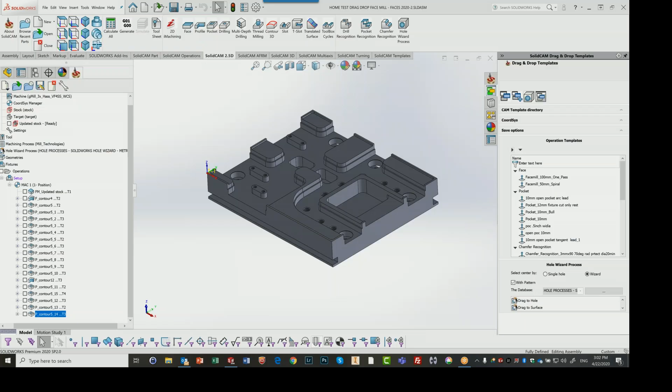If you remember from our last session, we had started working on this part, as you see on the screen. We had done a face milling operation on top, did some profiles around the part, and also worked on this pocket here in the middle.

What I asked everyone to do was homework, now that we knew the profile and pocket operation and face milling. I had asked everyone to go back and continue on with this part, working on these pockets and areas that need profiles, to see how far you can get.

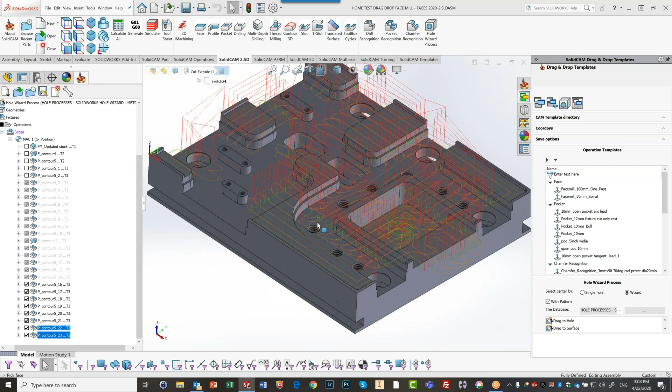Okay, so all of these operations, I can just go ahead and work on them and just drag it there instead of actually creating new operations each time. And this I can do for every single one of these areas. Now you'll also note, let me just get rid of all those check marks.

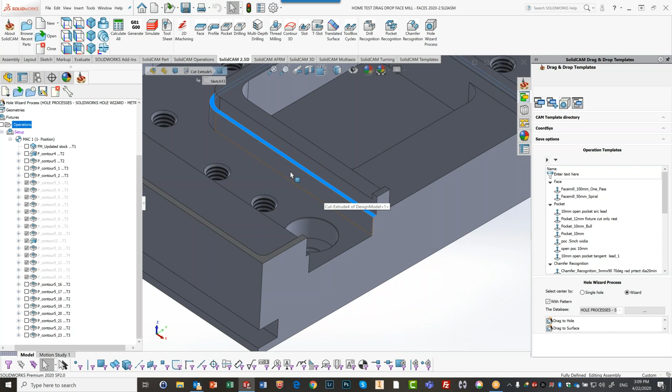I have a step over here, this area over here. Now, it may seem like a simple profile, which it actually really is, just a simple profile operation. But since this is a surface, I can actually treat this just like a pocket operation. Why is that? Because I have my geometry, which is the entire floor over here, and these edges are open edges.

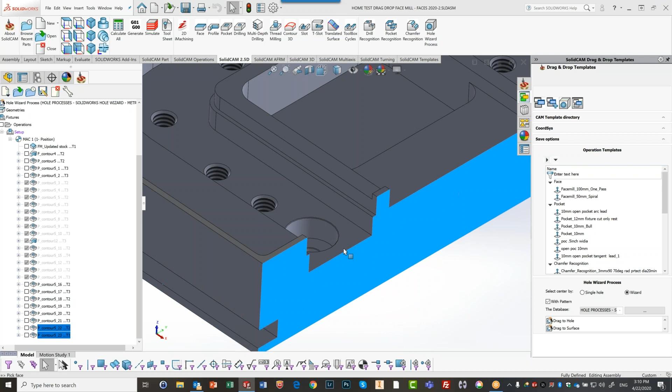Okay, so let's say I take these two operations that I created before. Or I can actually say these are over here as well. Why am I going all over the place? I'm going to take these two operations. Why these two? We have a rough and finish. I can take them, drag it to that surface. I'm going to hold my control button, then click onto this surface as well.

Continue around this surface, even this surface over here, this one over here as well. Every single one of these surfaces I can click on. And when I'm done, just let go of my control button. And as you can see, all of them are created. So basically, in just a few moments, I actually created all the operations that I really needed.

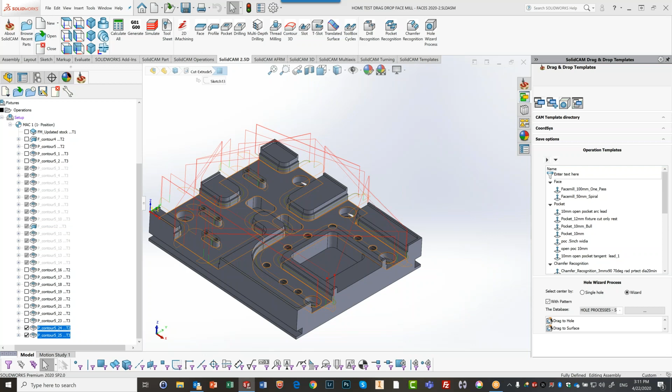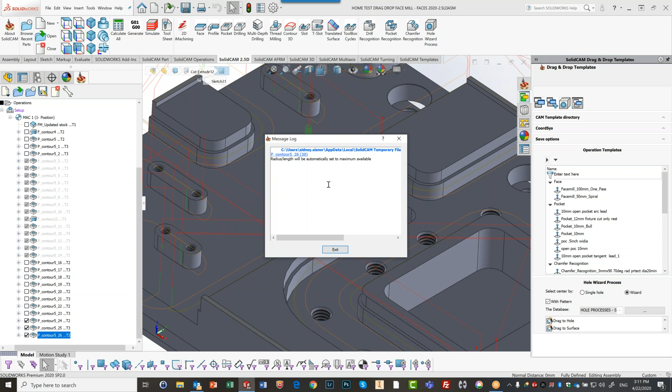Wait, there's one more. Almost forgot about it. Let's not forget about these two pockets over here. So again, I can take these operations here, drag it to this one and this one here. And we have our pockets for that area as well. Now, sometimes you may have something like this pop up. Why is that? Let me just click on OK. And get rid of these two operations over here, sorry. This and this.

I want to get to a specific operation. Just a second, which one do I want to get to? Not that one. Yes, I want to get to this operation here. So what we have here is as follows. You'll note that this type of pocket over here is a closed pocket. There are no open edges. So in order for it to plunge into this pocket, it's using a helical ramping to get into that pocket.

Now, since I used a specific tool to go into here, if I were to use this ramping angle or this diameter that I have over here, that will not fit into this area. Let me just open up that operation and let me show you what I'm talking about exactly.

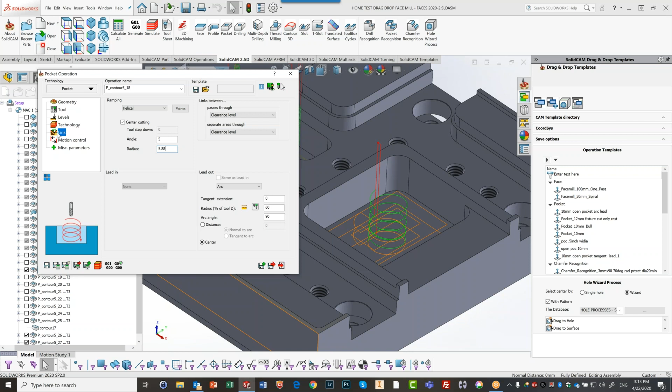If I go to my link area, you'll note that we have what we call ramping, and it's default at helical. And it's going at a 5-degree angle at a radius of 5.88, which is based just under the radius of that particular tool. This tool is, if I believe correctly, a 12-millimeter end mill.

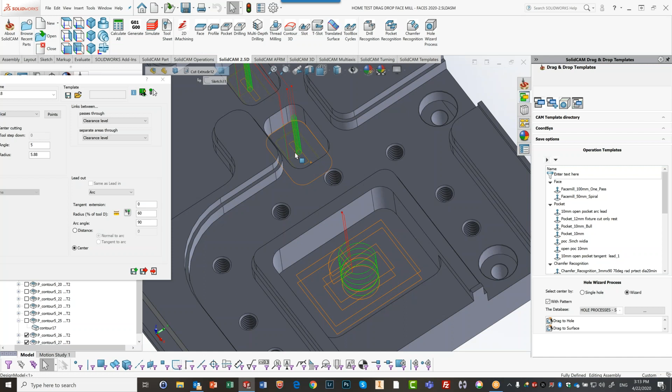Now, that's fine for over here, but it's not necessarily good for over here because this is a smaller pocket. So what that message said was, it's just correcting itself that it will use the largest possible radius for this area over here. So now that I've done this entire pocket, I want to continue on, and let's talk a little bit about the drilling operations. We did face milling, we did pocket profiles already, we did pockets, and now we want to deal with drilling operations.

So let me just get rid of what we did just now. I want to delete all of that. Just click on delete, and I can delete that. I'm going to take what I have up until here. I'm going to unsuppress. That's already stuff that I've done before. And as you can see, everything is active again.

So just to run the simulation before I do this, to see exactly what I've done up until this point, on top over here, I'm standing on operations right now. So on top, when I click on simulate, it's going to simulate the entire part. I'm going to do solid verify simulation and just play everything. And as you can see, everything over here has been machined out. So what's left to be done over here are the holes.

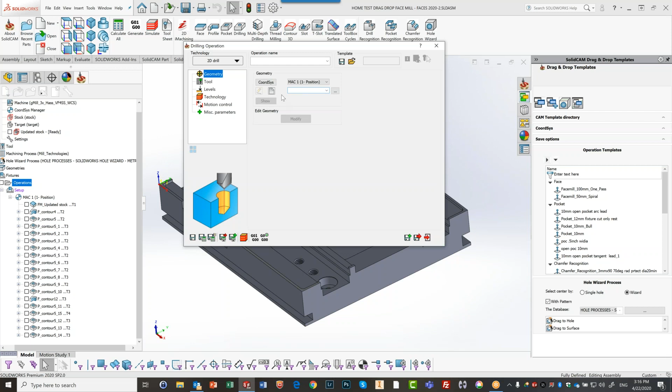Drilling operations, just like any other operation, need to have a geometry defined. Now, a drill geometry, as opposed to the other geometries, is not a boundary, but a point. What point do I actually want to drill into the part? So now, on create geometry, we have drill selection.

Right now, we have different modes for creating a drill. Let me just open that up. There's select and unselect. We have select centers by: how are we selecting the centers? Our default is multi-position. Multi-position basically means picking a face. So let's say I click on this face over here.

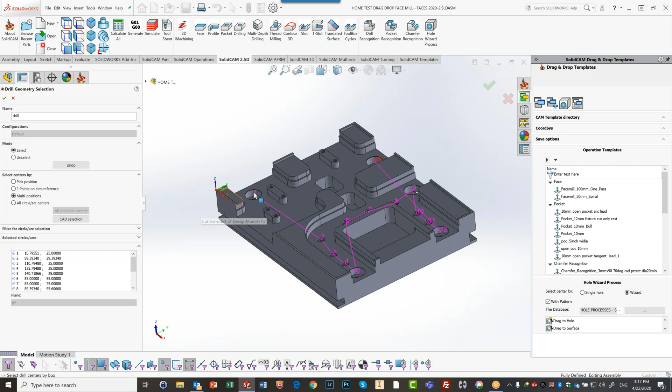You'll note that it created the geometry for every single hole that is on this face, including holes that I may not want. As you see, it took these holes here, but it also took these counterbore holes. I don't want the counterbore holes. So let me go back here; I can right click on one of them and say delete all. In other words, I need some kind of filter that's going to say I only want a specific diameter of holes.

Now, before I do that, let me just show you one more option over here. Instead of clicking on the face, I can also click on each hole individually. If I click on the inside of each hole, it creates it just for that particular hole. So that's good if I want to do individual holes. I can again do it for every single one of these holes over here. But I don't want to do it that way, so I'm going to again delete all.

What else can I do? I mentioned the word filters before. So let me open up my filter over here. Right now you see it's marked at all circles: take every single circle on the face that I click on. And that's exactly what happened. But I don't want that. So we have another option here, by radius. If I know the radius, I can write in the radius over here.

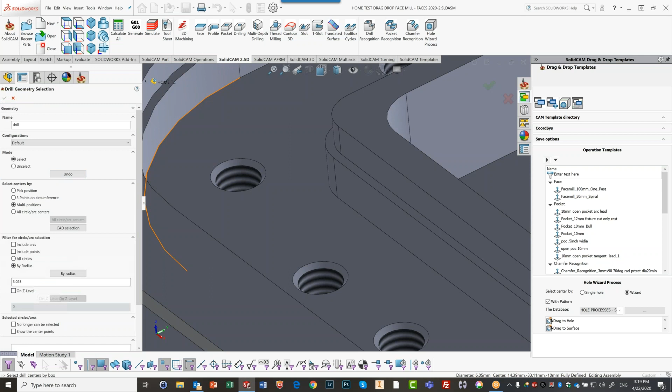If I don't know the radius, I can click on by radius. This is actually a button over here. If I click on it, let's zoom in here, I'm going to click on the very top, the radius that's actually touching this surface, and I'll accept it. Now you can see that it automatically filled that field for me. So all I have to do now is click on the surface. It'll only take the holes that are on that surface and that have that radius. That's all I needed to do.

Before I accept it, another point that's always good to do. You see where it says name? It says drill. This is actually going to be the name of my operation as well; it's going to use what's written over here. Now I can have 500 drilling operations. How am I going to tell them apart? So in the name field I can fill in what name I want.

I believe this is M6, so I'm just going to write M6. I may be wrong, I just don't remember exactly. Could be M6 or M5. Okay, I'm going to accept that. That's the name of my drilling operation geometry.

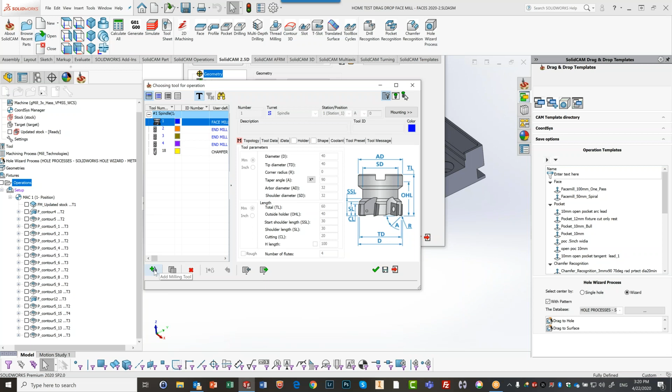The tool that I'd like to use is a spot drill. So I'm going to create a new tool, and over here we have a spot drill. I'm going to just leave it. Now, I don't want a 6 millimeter. I want an 8 millimeter spot drill.

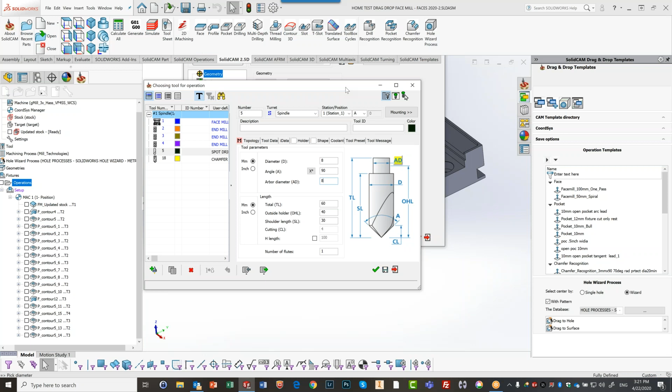Why do I want that? Because I also want the spot that I'm going to have over here to create the chamfer that I need for that particular hole. So I need an 8 millimeter spot drill. I'll accept that. My levels.

There's something here called upper level, which is user defined. And we also have by updated stock, according to where the stock is at that point. Right now, I'm just going to use user defined. We'll get into that at a different point. My upper level, if I put the focus inside here, I can just click on that top surface. And you see it's going to start from -10.

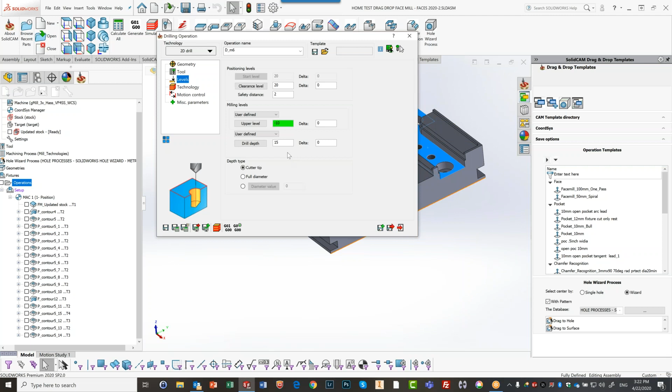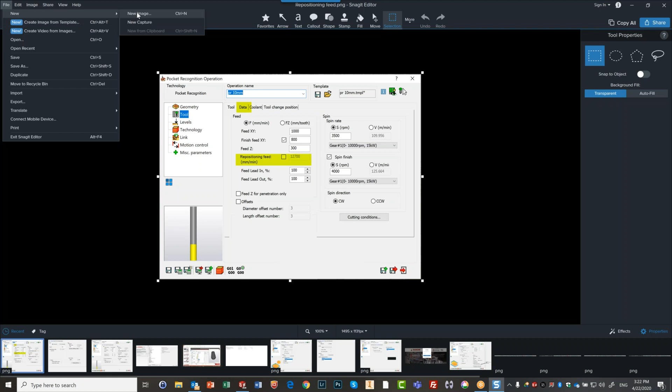Now, my drill depth at this point, how deep do I want to go from -10? Well, what I want to do is, let me see if I can do this this way. Hold on a second. Let me see if I can do this correctly here. I once knew how to do this. I want to draw a little bit. I'll do it here. And I'm going to create a file. Just a new image. Okay, let me just enlarge it.

Now, what I'd like to do is as follows. Let me just get a drawing aligned. This here is my surface. Oops, my mistake. I want to make it a little thinner. Let me get rid of that one. Delete. I want to have it a little thinner. Okay, this here is my surface. This here representing my hole. I want my tool, which has this angle here.

To go down until this diameter of the tool hits my upper level over here. That's what I would like to have it do. Maybe even just a little more if I want to have it to leave a little chamfer on it. That's my goal in this particular case. So how do I do that? First of all, you'll note that my drill depth is set as 15. I'm going to set it that I actually want it to go 0. In other words, I want to actually go just to that surface, but I want to have a particular diameter value. What diameter value do I want to have?

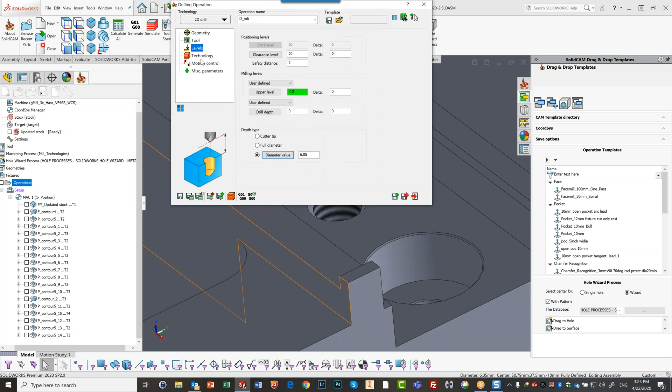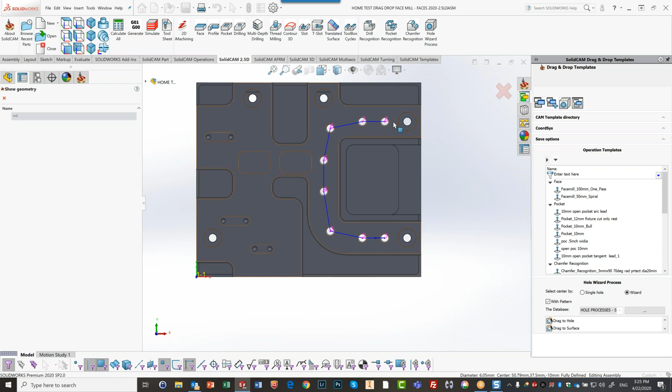Next, technology. The sorting, basically, if I were to show the sorted, and we'll go to the top view of the part, you see it's actually going to work in this fashion, going around this way. Why is it going this way? Because in this particular case, that's the way this feature was built. It's taking all of these holes in the order that they were built. We'll talk about the advanced sorting option at a different point. What else do we have here?

Drill cycle type. This depends on the type of machine that you're working on. You have the cycles for that machine. When I'm doing a spot drill, I like using G82, but that's my personal preference. The reason is I like to have a little bit of a delay when it gets to the bottom, to make sure we get a full spin of the tool. How much of a delay? Not really much. Where do I set the amount of delay? If I go further down here, we have the data. Click on data. How much is my dwell time? For me, 0.5 is enough. That's all I really have to do at this point. Save and calculate.

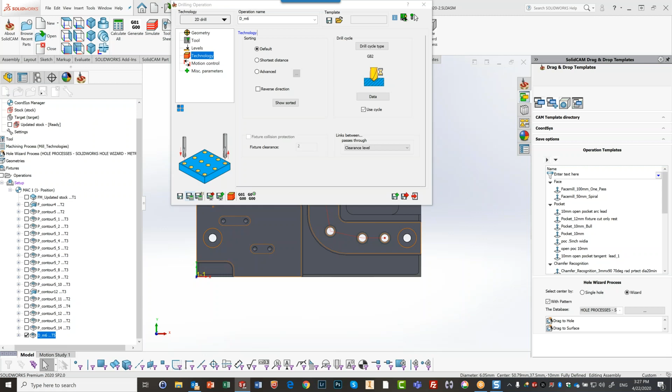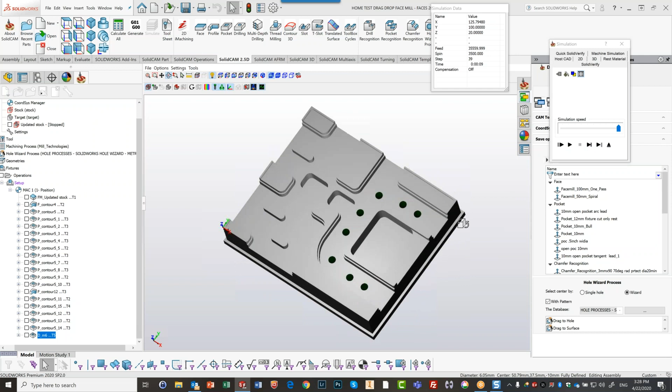Let's run our simulation and see what actually happens here. We'll do this one step at a time, and I'm going to do this also in Solid Verify. You can see our tool is going to go down. Right now, it's at 20, its clearance level. Now it's at the level of 2, the safety distance. My next step, it's going down to -3.02. This is a 90-degree spot drill, so it knows how to calculate automatically the depth that it needs. Goes back up. And now it ran all of them. So that's exactly what happened. So I have my first operation.

My next operation, I want to use now the drill. The drill that I'd like to use would be for an M6, a 5 millimeter drill in this particular case. So instead of creating a new operation, I'm going to go over here and do what they call save and copy.

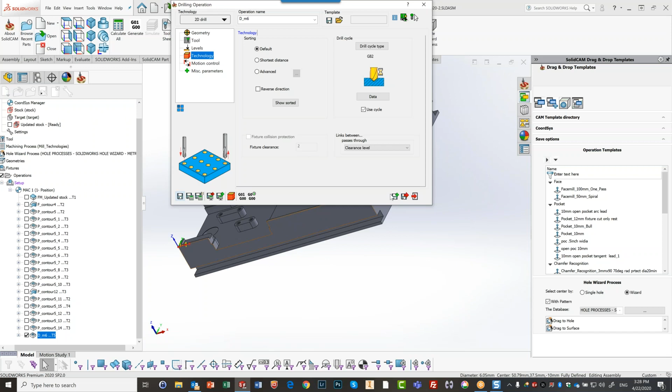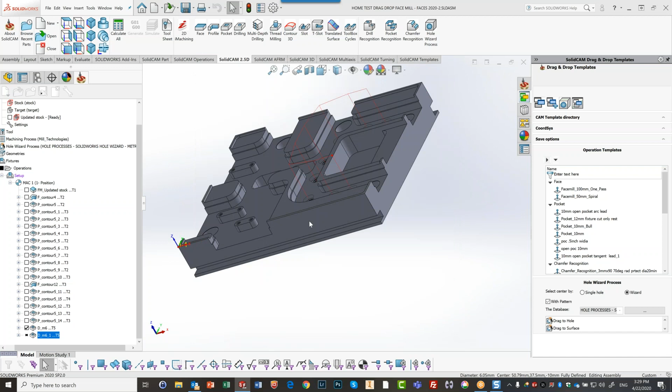It copied that operation, made a new one, and now it's open to that operation. So now what do I have to do? I have to change my tool, and I'm going to create a new tool. This time I'm going to use a regular drill that is 5 millimeters in diameter, standard 118-degree angle. Okay. Don't forget you have your tool data, just mentioning that.

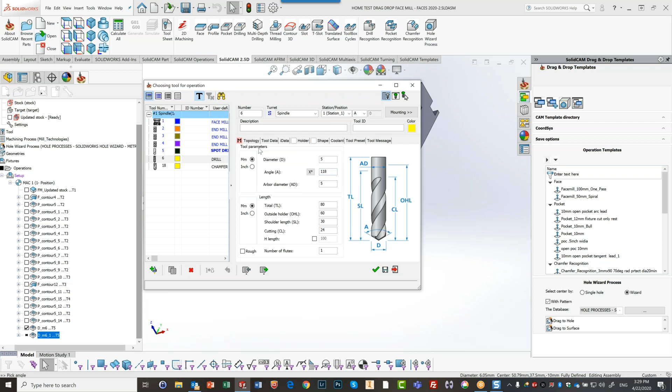Now my levels, let me see my part over here. This is a through hole. So what I'm going to do is my depth is going to be to the very bottom of the part. And I want the full diameter of the drill to go to the bottom. In other words, the full diameter is going here. Actually, I'm going to go a little bit deeper to make sure the tip goes out.

Now, I know a lot of people don't like to work to the exact depth of the part over here. They like to go a little further than that. So we have over here what we call delta. I'm going to go another -0.3 millimeters. Okay? Everyone can do whatever they want. Okay.

Technology. Now over here, I'm not going to use G82. I like to use G83 for pecking. And in my data, my step down is what I want in this particular case. So I'm going to step down every 3 millimeters and click on OK. Save and calculate.

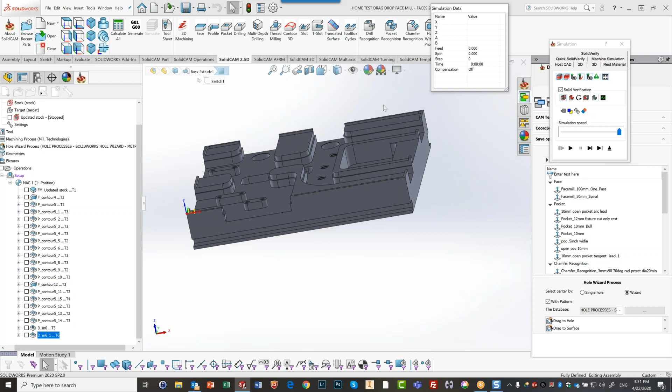Again, we'll run our simulation. This time I'm going to use the regular Host CAD simulation. And as you can see, my tool is going to go down. Sorry, I'm going to do it again. My mistake. And you see it's pecking its way down. Okay? And then going back up to the clearance level. All the way through the end.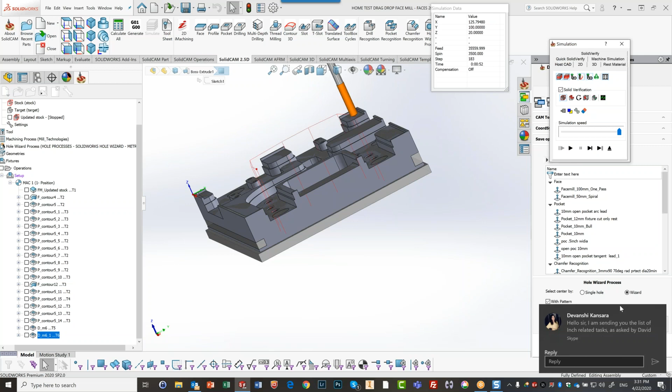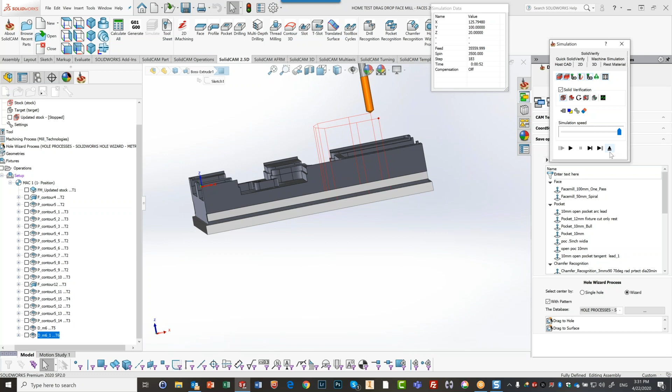Okay. Now you've noticed though that it's going up to its clearance level. What if I don't want to do that? What do I mean by I don't want to do that? I only want to go up maybe to its, let's see what else I can do here, not clearance level, but safety distance above the upper level. Let's try that now. Okay. There was no change. Why? Okay. Let's go back over here. I think I mentioned this just before.

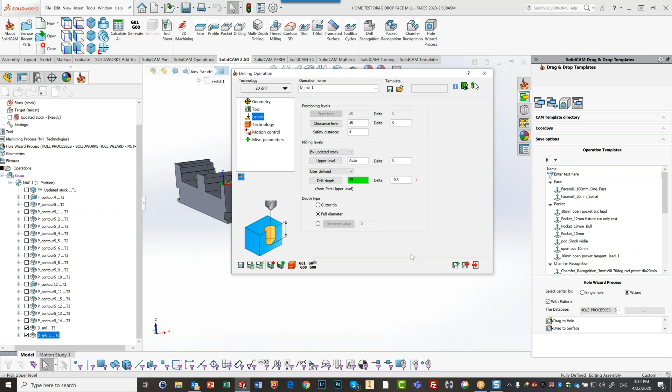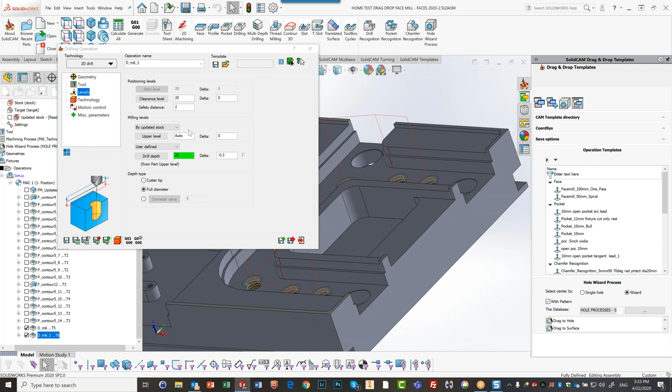Okay? So if I've machined this pocket out already, it'll start from this area over here. If for some reason I decided I first want to do my drilling operations and then drill out the pocket, so my stock is really all the way up on top over here, it'll start from the top. Let me just do save and calculate. At this point, it looks exactly the way it did before, no change. Okay?

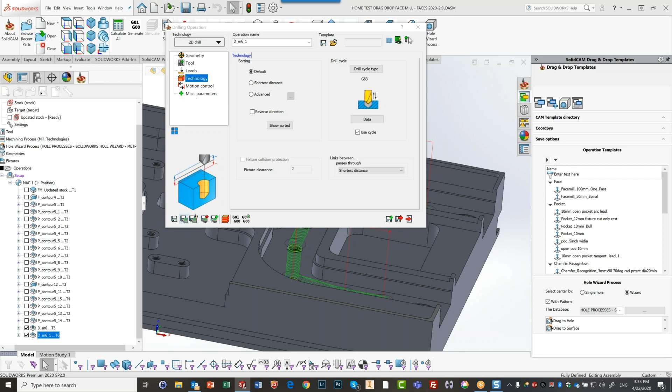However, if I use this, that means we're recognizing the stock. When I'm recognizing the stock in my technology area, I have something here, links between. I can use something called shortest distance. If I were to use shortest distance, save and calculate, take a look what's happening now. Instead of going up, it's staying actually just 2 millimeters above the actual hole, and then moving towards each hole. So there's a lot less waste going all the way up to the part.

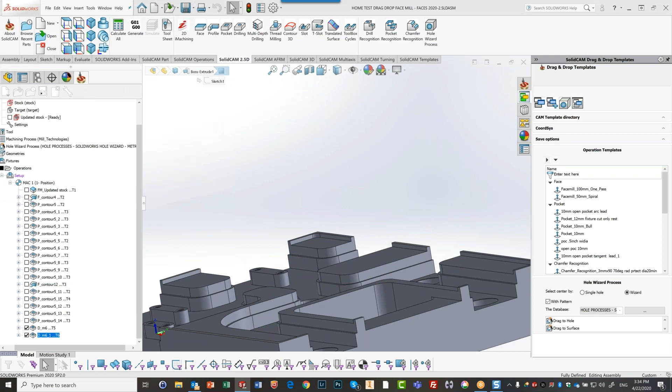Let's take a look at the simulation. Solid verify. Oops, I did it a little bit too quick. It's doing its pecking operation, then going to the next one without going all the way up. Okay. Great. Next. What do I want to continue on doing? I still have to do my tapping operation. Okay.

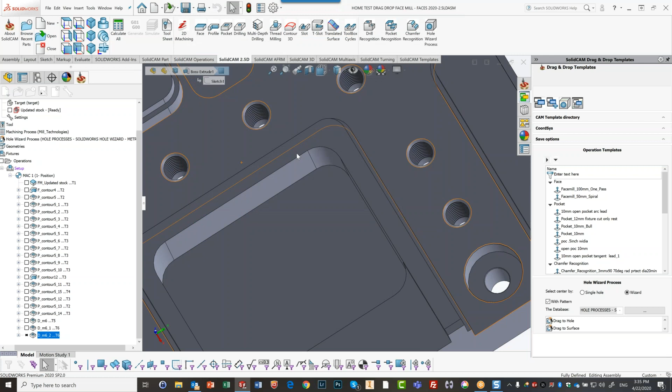Let me get rid of these over here. These are tapped holes. So I want to go down and continue with my tapped holes. So again, save and copy like I did before. I have all the information I had before. I'm going to change my tool. This time, I'm going to use a tap. Okay? Note when I'm using a tap,

I have different options over here. For example, I can use thread per inch. Okay? Pitch per inch, or as we use with the metric, pitch per millimeter. Okay? I'm going to use this. The pitch, I'm going to leave it exactly the way it is, actually, because this is an M6, 6 by 1. Okay, that's our default, by the way. Tip diameter is what the diameter is at the bottom. I'm just going to do select the tool.

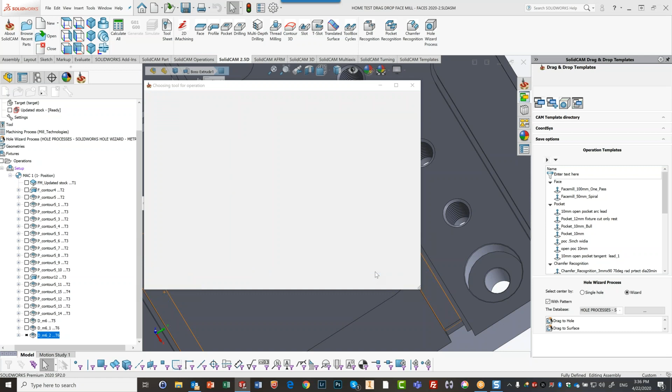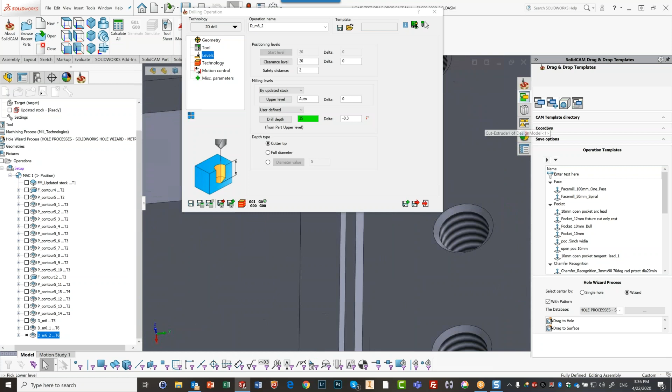The levels, okay, in this particular case, I want to have just the cutter tip to go to a specific depth. Now, I don't know exactly what the depth is because I don't have the blueprints in front of me. So I'm just going to guess it's somewhere around there.

Okay, about 23 millimeters. I'll probably have to go back and look at it later on. Now, if I go to my technology, you'll note that it automatically changed to my tapping cycle. Because once I choose a tap, that's all it can do, just your tapping cycles. If I go into drill cycle type, you'll see that is all that is available. Okay?

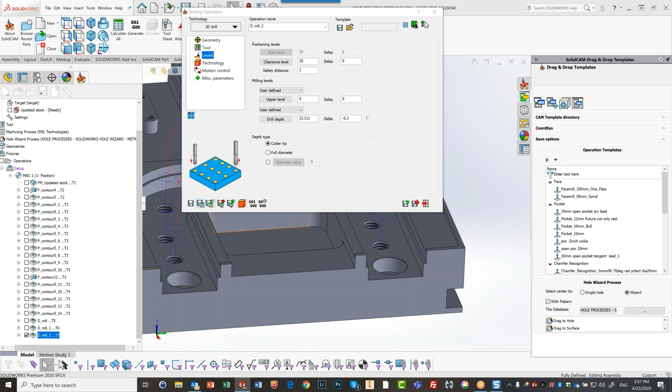Okay. Save and calculate. And we have our operation over there as well. Simulate that. Solid verify. Okay, nothing was done over there. Probably the reason for that is, okay, I'm going to get rid of this over here. User defined. I'm going to do from over here, just for that. And my drill depth is going to be, oops, sorry.

Here we go. Sidney, it's Yossi. I think that you need to change the delta, if I remember right, because the delta here is minus 0.3. Right. I noticed that also. Thank you. Okay. I'm going to do to that depth over there. I'm just going to put here 0. Okay. Save and calculate. And now we have what we need, I believe. Yes. Okay.

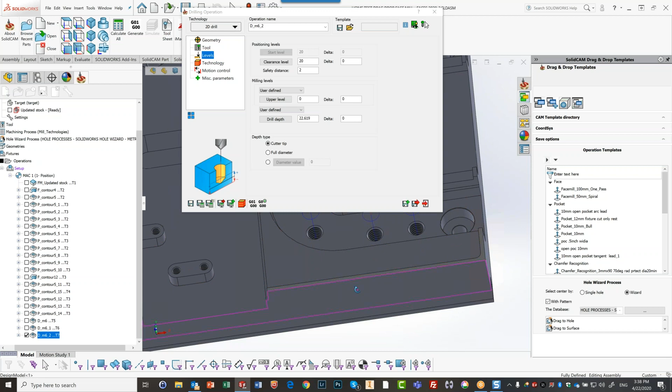Sorry, it's Yossi again. I think that you need to make it in plus because the thread is not till the end. The depth of the thread is not till the end of the hole. That is true. So we need to get the delta in plus, not in minus, right? Not 0. In this particular one, I didn't hit the bottom of the part. You're right. If I would have done this, then I would have had to do here, let's see, 3 millimeters. Okay.

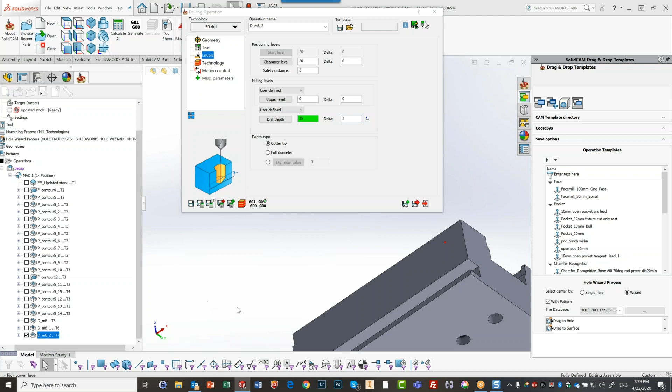Yeah, exactly. This is what I wanted to see. Okay, I could have done that as well. And that's a very good point, instead of me guessing. But after I do my next step, you're going to see that everything I did over here, I really didn't have to do it. And you'll see why in a minute. The reason why I'm showing you all of this is because it's important to know what is actually inside the operations.

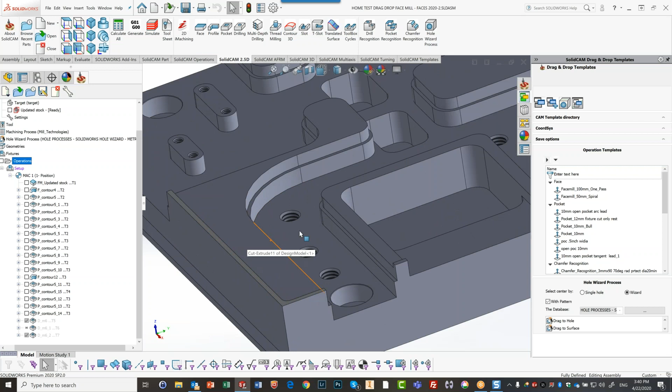Now, I said there's a quick way of doing this. Let me take what I have over here. I'm going to, again, suppress it. Remember what I said before about suppressing. These particular holes that we have over here, including these over here, were all created inside SolidWorks, using SolidWorks Hole Wizard. If I were to go to the part itself and just open it for a moment, I'm going to click on one of these holes.

You see, it was created by Hole Wizard of SolidWorks. If I were to right click on it and go to edit feature, you can see all of the information that is over here. M6 by 1, the end condition of the tap is blind. Whatever information I have over here, if there's a countersink at the very top of the hole, everything, all this information is here already when I created the part.

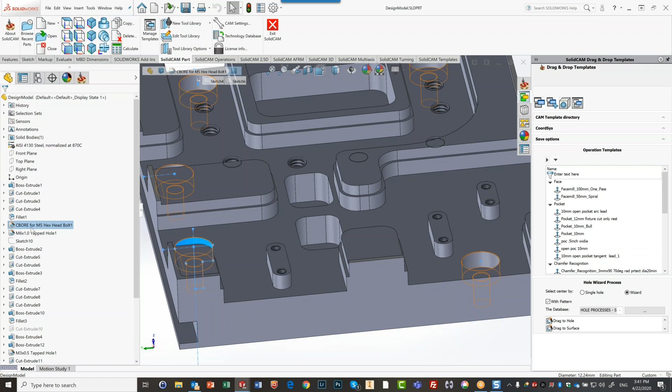The same thing, by the way, for these holes over here, which is an M3, and this over here, which is a counterbore for an M5. So what's the quick way of doing it? We have here on top something called Hole Wizard process. It's a process that we built that deals with everything that was done within SolidWorks Hole Wizard. So if I were to click on that and click on this hole over here,

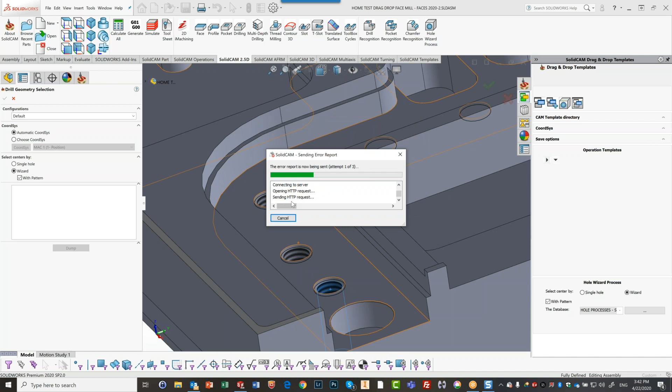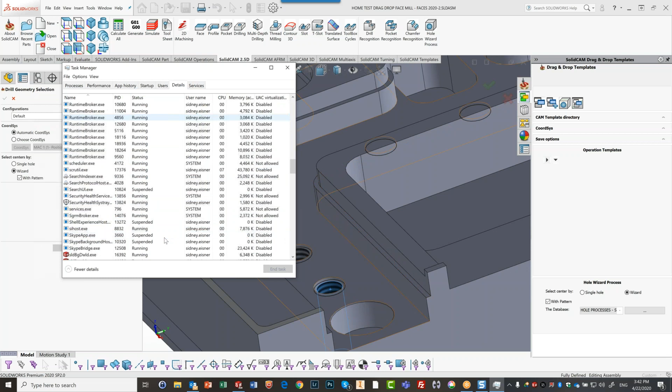the program will crash. I hate when that happens to me. That's because I'm working in a build that I just took today. My apologies. Close the program. I hope this is not affecting everything else. Just a moment. We go to my task manager, go over here and end my process tree. Okay, I'm going to restart the program. Get this out of the way.

By the way, photography, that's also one of my hobbies.

Okay, rerun the program. It's actually good that it crashed because when I open up the part again, I want to point something out.

When we're working in a SolidCAM project, which we were working on up until now, we have what we call a Prz file. A Prz file is a compressed file of our SolidCAM project, and that's what we're working on.

When we're working on a Prz file, I'm going to browse to go to my recent parts. I can go with that over here as well. Browse. Okay, it actually creates a temporary folder - it holds the original file in a temporary folder and opens up a regular working file on the computer.

Now, if it crashes like it just did, when I open the file, it's going to ask me if I want to continue with my temporary folder version, which is what I was working on, or go back to the original. If I go back to my original, everything I just did will be deleted, or rather, it'll go to whatever was not done in this area. If I go back to my temporary folder, it'll reopen and just go back to exactly where I left off.

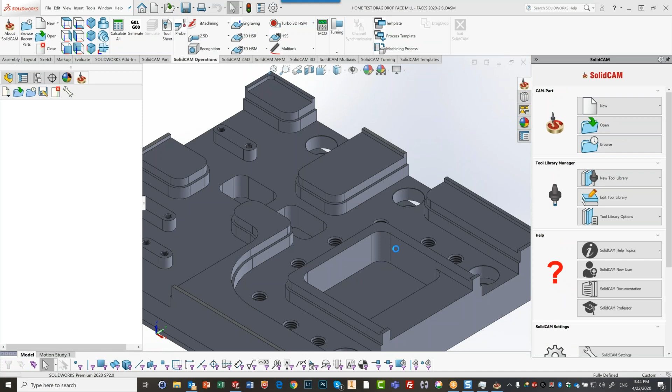Okay, so now I have the part again. Let us just finish.

We were talking about the hole wizard process. I'm not going to use that now - I actually am, but we have a different way of using this also. Remember I said we have something called drag and drop? Over here, I also have a hole wizard process drag and drop. I can just take the drag to hole, point to that particular hole, and let go.

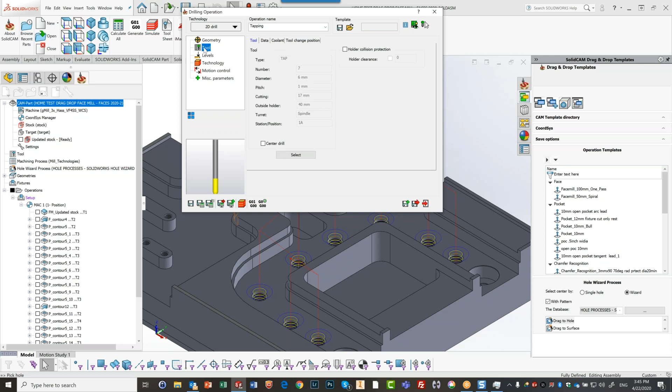What's happening now, it's creating automatically 3 operations: the spot drill, the regular drill, and the tap drill for those operations. You can see, even if I were to open up just the tapping operation, the tool that I used was the proper tool. I'm going to use that same option for these tools, for these holes over here.

Different tapped hole, 3 more operations. You see how quickly he did it?

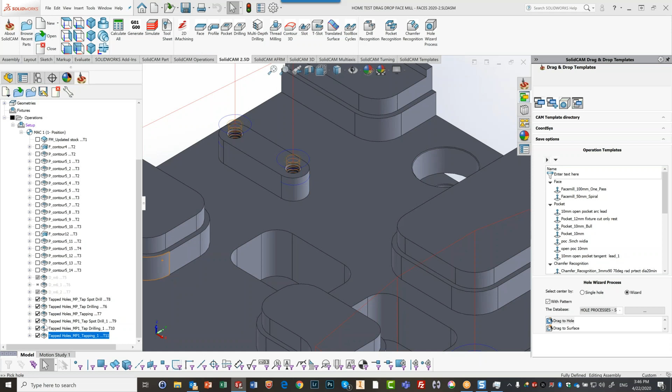I'm going to open up my tapped hole, my last operation over here. If I go to the tool, it's a 3 millimeter M3 by 0.5. In other words, it recognizes whatever was done inside the SolidWorks hole wizard and puts all the information in, and picks the proper tool needed for those operations.

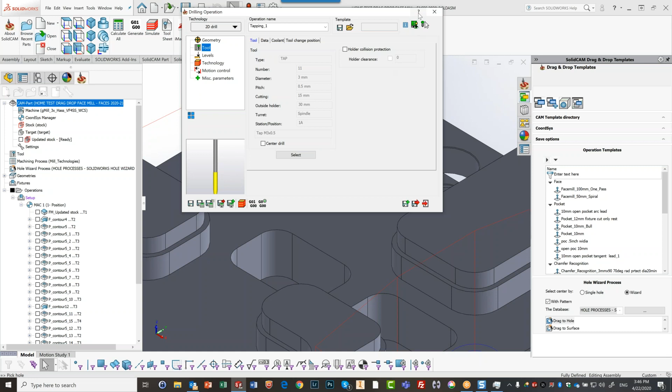The same thing can be done for the counterbore holes. If I take drag to hole to the counterbore, it'll work on all the counterbore holes that were created with that hole wizard. In this particular case of a counterbore hole, it's using 5 operations, creating 5 operations. Why 5?

Let's see, let's just mark all of these over here and run my simulation, using SolidVerify. The first one was the spot drill that I needed. The second one was the drill that went all the way down.

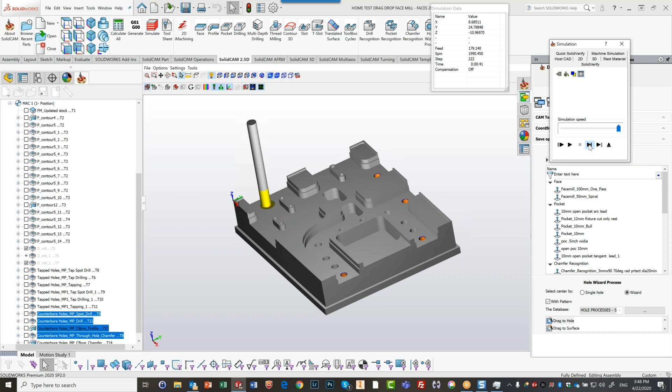The third one, I'll start slowly, was the drill opening up - sorry, the end mill that's actually doing a circular helical profile into that hole for the counterbore. That'll go to the end.

The next one is doing a little bit of a chamfer for the bottom hole, because it was a very small chamfer we like to put on. And the next one...

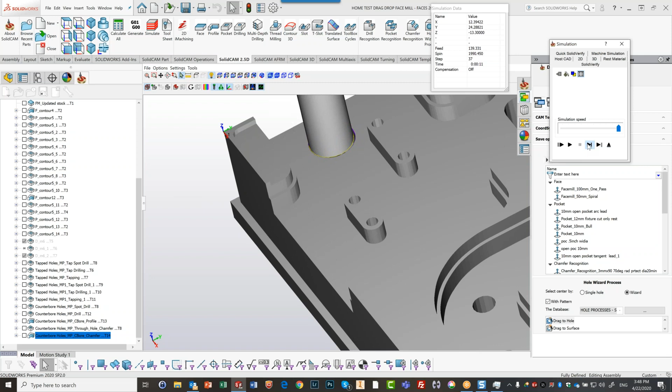Oops, sorry, I forgot to mark that one, my mistake. The next one is using that same spot drill, actually for putting a little bit of a chamfer on the tool itself also, on the hole itself. I'll run that to the end also. So all of this was done over here.

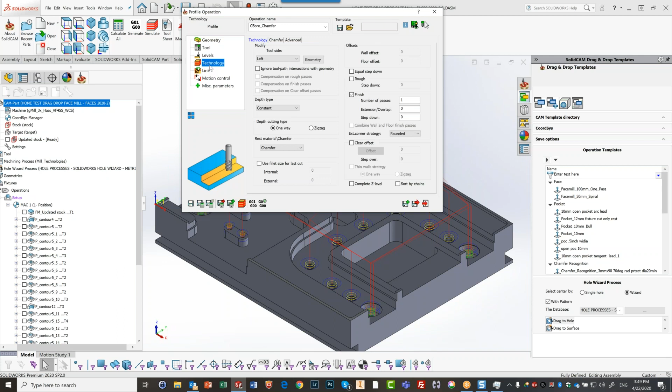Now, every single one of these can also be edited. So if I don't like something that was done over here, I can just open up the operation. And just like any other type of operation, I can change tools, I can change levels, I can change technology type. Anything I want to do, I can change in here. These are regular operations that we have here.

Any questions up until here? So it's just again, Sydney - yes. So what does it mean, the hole wizard process? Does it mean that it's similar to having a subroutine already built before inside here?

Yes, we have a default machining process tied into the hole wizard process. Okay, so it is that. So it's easy to use it first for any hole, because then you can just change the tool, or if you want to change the process inside, but you have a built process for this hole.

That's correct. I can do it for every single hole that was created using the hole wizard process of SolidWorks. But let me just show you one more thing - you notice I dragged it to each one of these individually, right? Each one type individually. I'm going to delete what I did here.

And yeah, those are suppressed. It's irrelevant. I have another option here called drag to surface. If I just drag this to the part, anywhere to one of those surfaces facing my home position, and then let go...

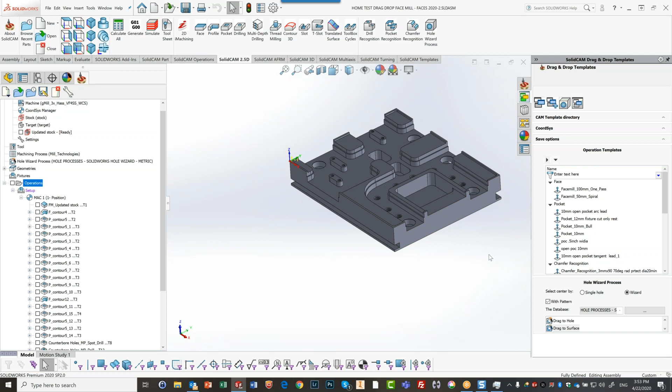Okay? And if we look at the part, we have sharp edges over here, over here, over here. We even have one over here. I don't want to touch any of the holes. So how do I do that?

We have something here called Chamfer Recognition, which, by the way, I think next year I'm going to change the name of this from Chamfer Recognition to deburring recognition instead, because this is not the correct name for it. It's confusing. Anyway, I'm going to use Chamfer Recognition.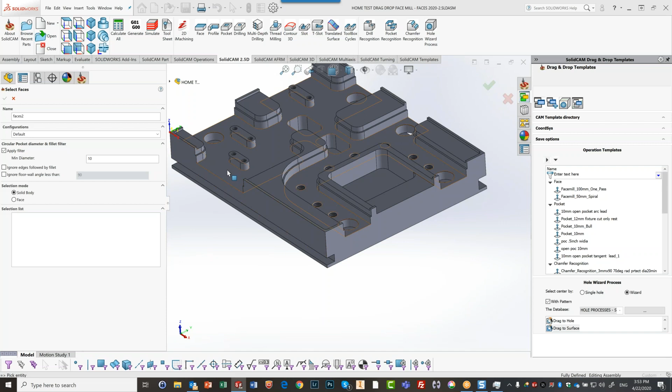When I create a geometry, I'm going to do several things. Remember, I said if I click on the part just the way it is right now, it's recognizing every single edge that's over there, including these edges over here.

Now, I said I do not want to pick up the holes, because I already did that. Let me delete what I did over here, unselect.

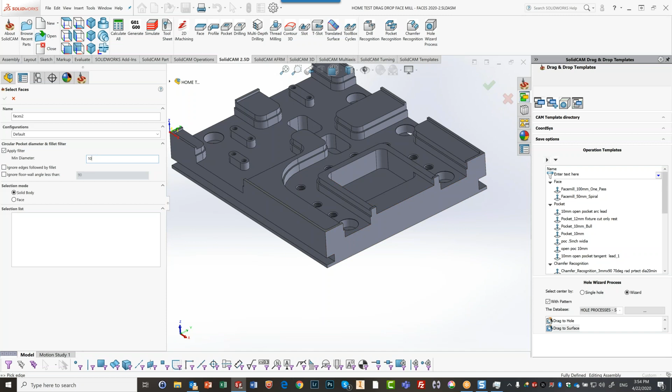And we have here what they call a circular pocket diameter and fillet filter. I'm going to say that my minimum diameter is over here. Now when I click in that part, it's going to take everything that's larger than that diameter. Anything at that diameter or less, it will not choose it. Okay, I'll accept this.

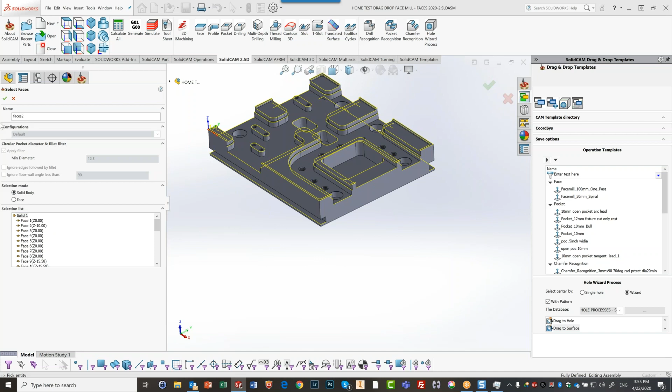By the way, you notice it says over here - I forgot, my mistake. The reason why I picked every edge is because it says here solid body. If I wanted a particular face, I can say, just give me a specific face, and then start picking faces. But right now, I want to do the entire part. I'm going to click OK.

But one other thing that's important to use over here also is something called 3D model protection. This will guarantee that my chamfer tool that I'm going to use will not touch the target. And why is that important?

If I were to look at my geometries over here, you'll see that my edges go all the way up to this part over here, all the way up to here. I don't want my tool to go all the way up to there, because then it's going to gouge into this edge over here.

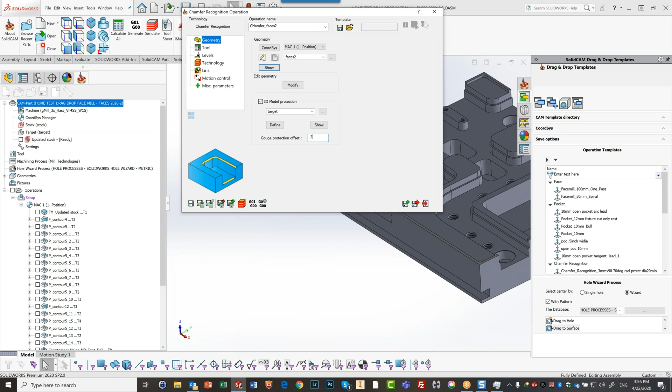If I put in 3D model protection, it'll protect my model itself. I can even say, how much do I want to offset from the model? Say 0.2 millimeters. The tool that I'd like to use...

I'm going to add a chamfer mill. I'm going to leave it at a 10 millimeter chamfer mill.

Okay, 90 degrees. Now, I know some people - I'm sure you've seen it also - say I'm going to take my spot drill and use that as my chamfer. Everyone can do whatever. You're not going to stop anyone from really working whichever way they want. They can use these kinds of tools, whichever way people are used to working. It's not my job to teach people how to work, it's just my job to teach people how to use the program, and then they apply the technology their best way.

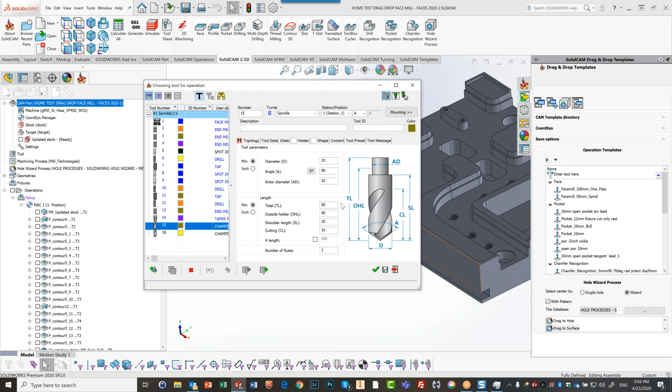So basically, you can use either a spot drill or this mill. We're not limiting what you can use. Okay, so I'm going to use this tool.

Accept that. In my levels, what's important here is how deep I want my chamfer and what size. I want to put a 0.2 millimeter chamfer - break all edges, 0.2 millimeters.

In my technology, I want to pay attention to the cutting diameter. This shows what diameter of the tool I want to use to cut with. Let's say I want to use a 2 millimeter diameter tool - actually, I'm going to readjust to 1.5 millimeter.

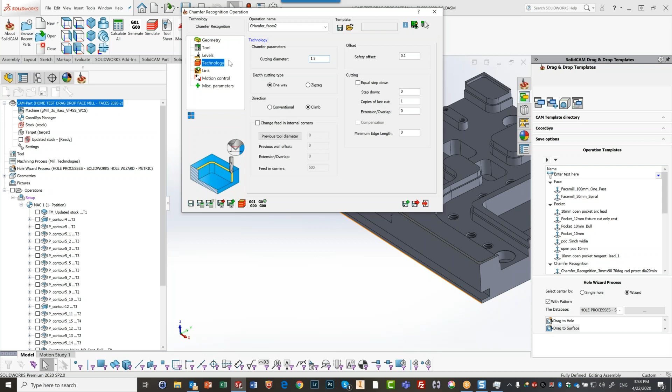I'm just going to do save and calculate now. What just happened here? Let me double click on this. It created a tool path for every single one of those edges.

Let's take a look at the simulation. I'm going to double click here again to reopen this and run my simulation, again using Solid Verify. Let me run it quickly. You'll note what happened here - it went in as far as it possibly could go without gouging the part.

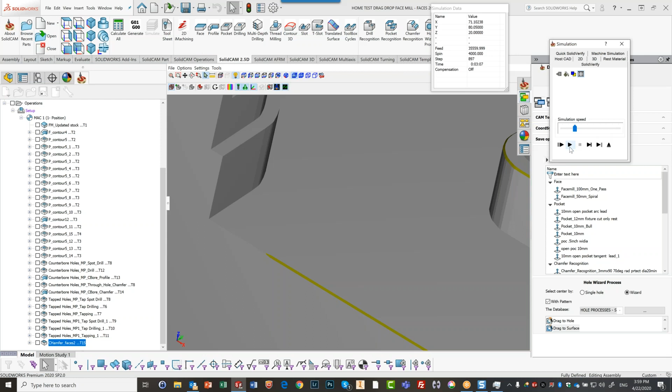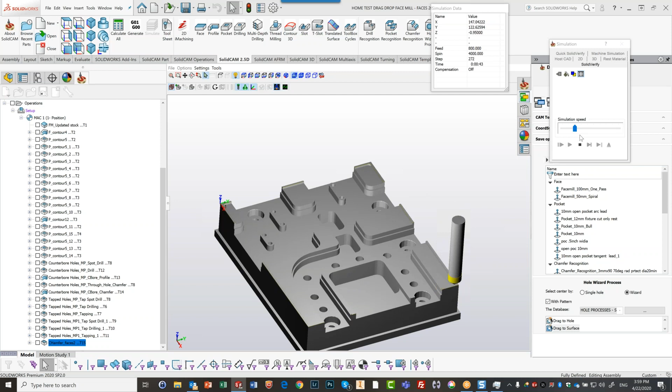Let me run it now a little slower so we can see what's happening. Now I'm going to zoom out. It's working on all of the edges. Let me go a little faster, and zoom into this area so you can see exactly what happened.

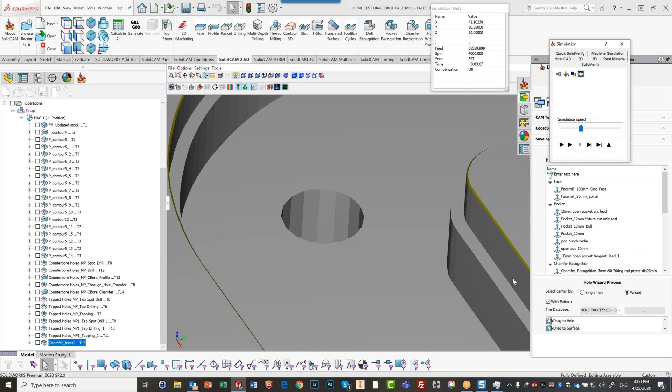You'll also note that these edges over here, it did not do. The reason for that is very simple - if I were to do this also to the step, exactly, because then it would hit our target protection.

So I can do several things. I can just change my tool. I'm going to go and use a very small tool, just to show exactly what we can do here - a 3 millimeter chamfer mill.

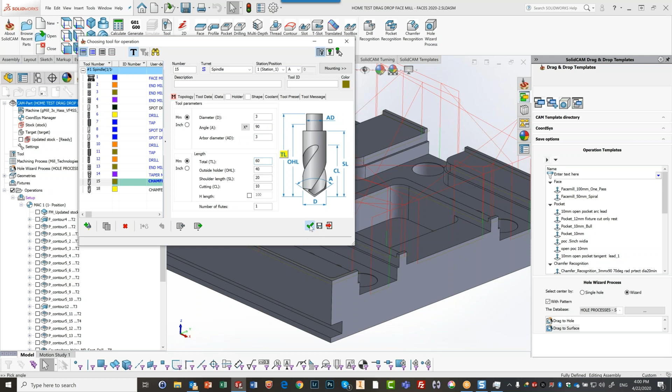I mean, you guys know better what to use, but I'm just showing this now. In my technology, I'm going to change this to 1 millimeter, then save and calculate.

Did it do it over here this time? Still did not do it - still too close. So let me enlarge my cutting diameter so it goes further away from the wall, to 1.3. Let's see if we have that now. Now it will cut over here.

Why is that? Let me bring this down a little. If I click on this edge, you can see the length of that is 1 millimeter - you see the limitation. Yes, okay, so I'm working within my limitations.

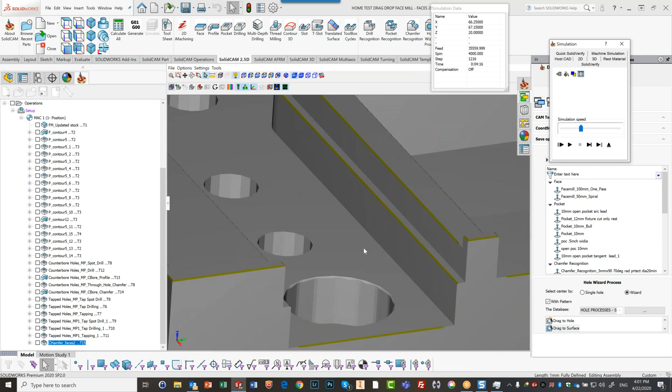Now if I run my simulation on the entire part, you can see it did that as well. And not only that, these edges over here - it's actually closer because I'm using a smaller tool. So that's one of the really nice things about chamfer recognition, which is really a deburring operation.

Okay, are there any questions?